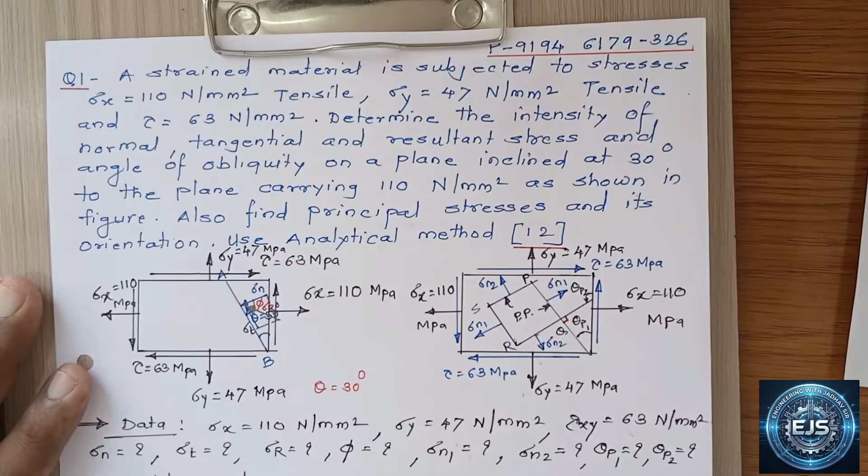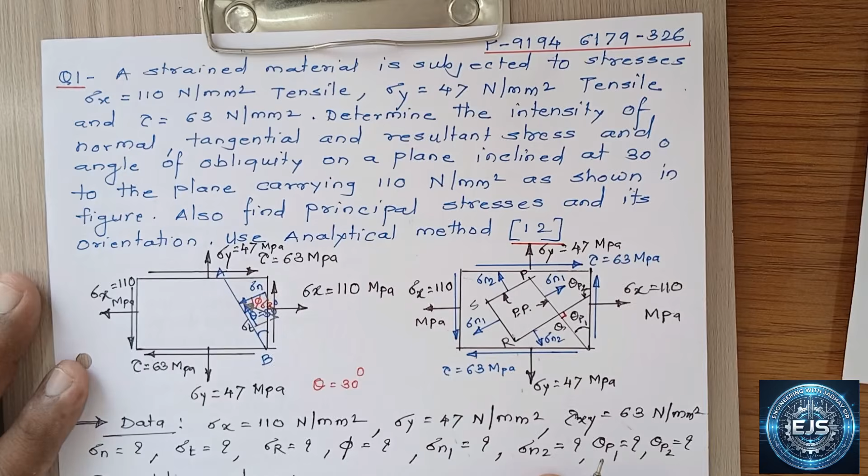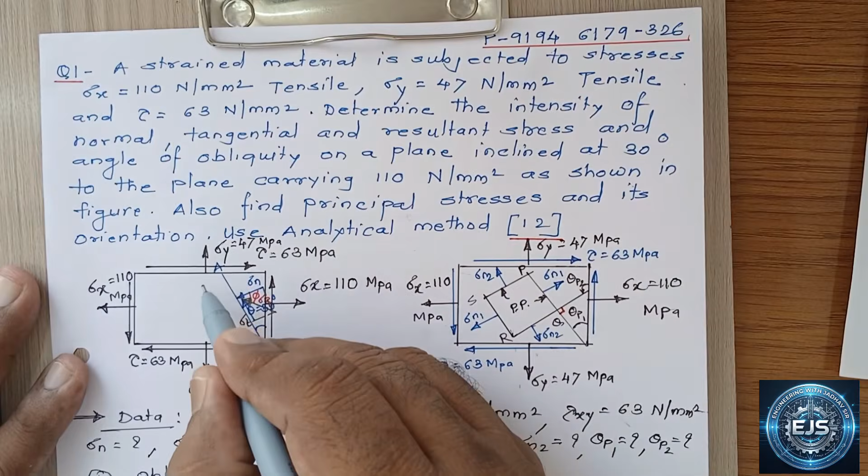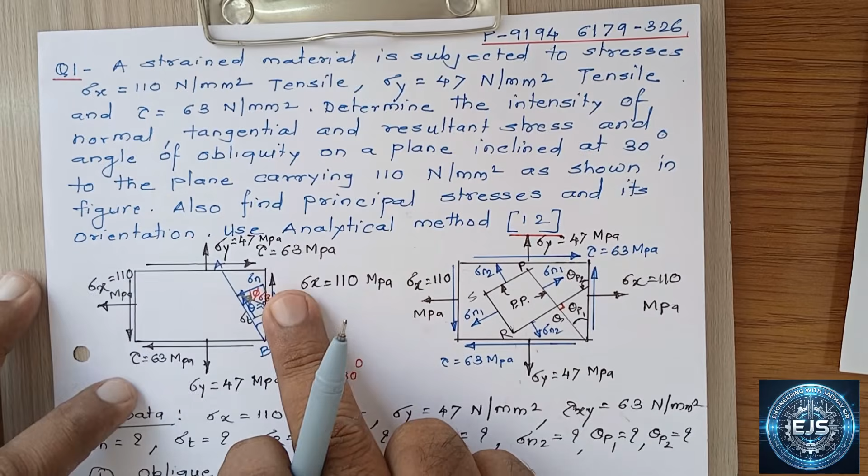Today we will discuss the first problem. A strained material is subjected to stresses: sigma x equal to 110 N/mm² tensile, sigma y equal to 47 N/mm² tensile, and shear stress 63 N/mm². So the component is subjected to biaxial stresses, sigma x equal to 110 megapascal and sigma y equal to 47 megapascal, both tensile in nature. There is also a torsional shear stress of magnitude 63 megapascal. On the horizontal plane the shear stress direction produces clockwise moment, and on the vertical plane the shear stress is of the same magnitude, 63 megapascal, but producing anti-clockwise moment.

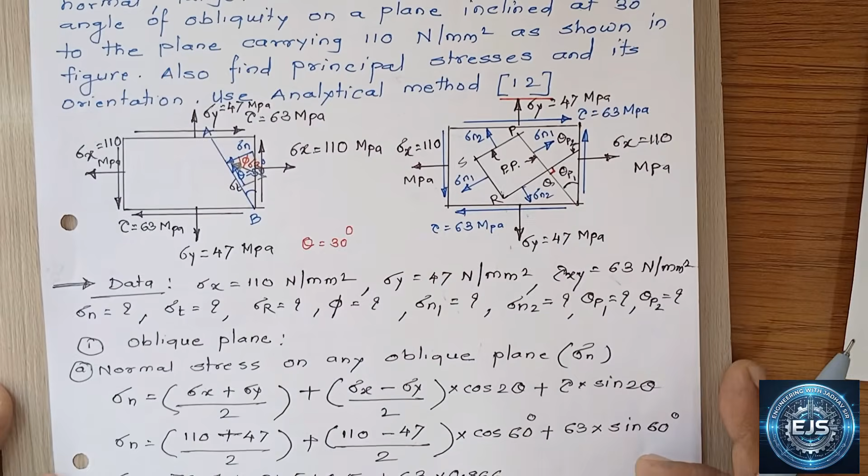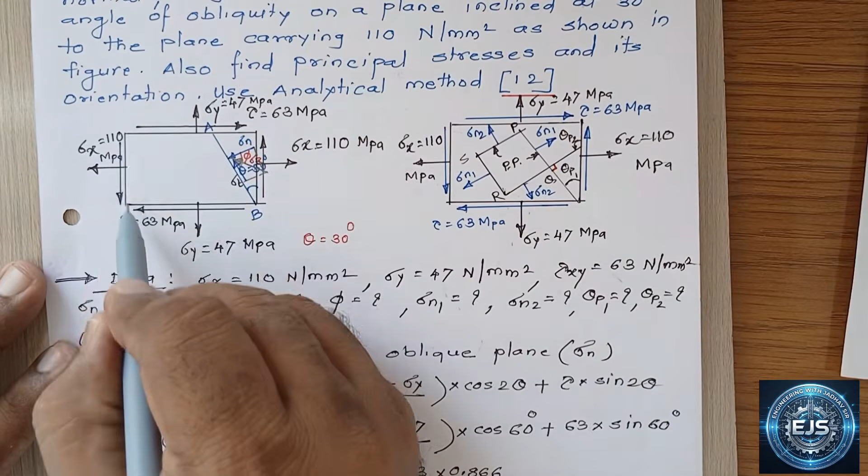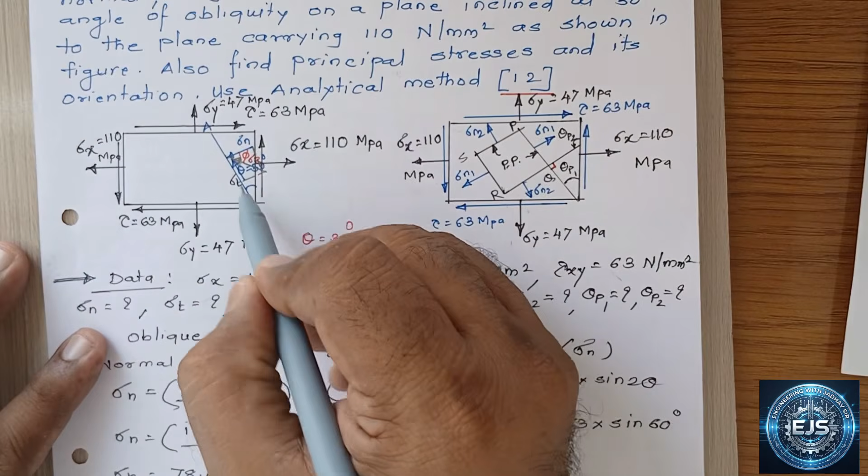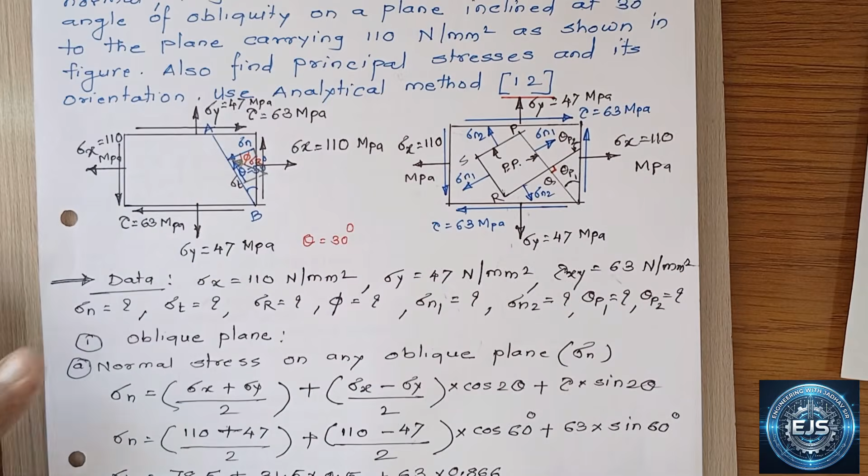This is a member subjected to tensile stresses sigma x equal to 110 megapascal, sigma y equal to 47 megapascal, both tensile, and shear stress tau. On the horizontal plane the shear stress produces clockwise moment, and on the vertical plane it produces anti-clockwise moment of the same magnitude, 63 megapascal. We consider the oblique plane AB, whose angle with the vertical plane is 30 degrees. On this plane, the normal stress, tangential stress, resultant stress, and angle phi need to be found in the first part. In the second part of the problem, the same member is subjected to biaxial stresses along with the shear stress tau.

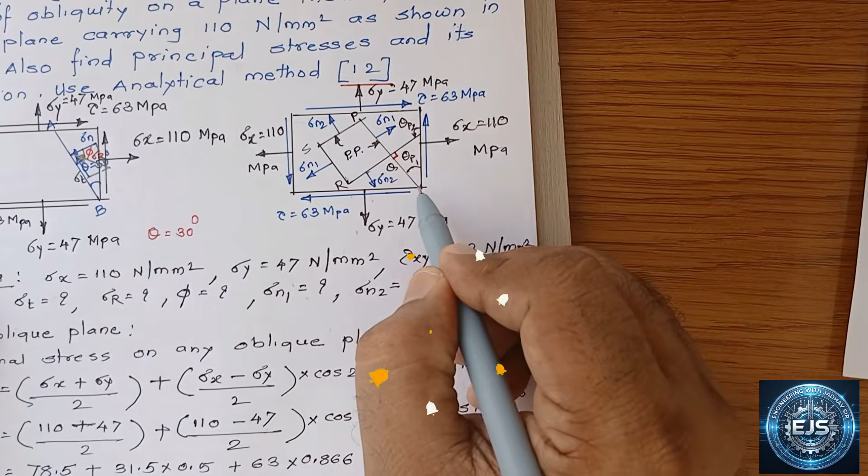Now in this case, theta p1 is the angle made by the major principal plane. In the diagram, PQ and RS are the major principal planes on which the major principal stress sigma n1 acts, and the angle of this plane with the vertical plane is theta p1. Theta p2 is the angle of the minor principal plane. We know the minor principal plane is perpendicular to the major principal plane. So theta p2 is the angle made by the minor principal plane, and here the minor principal planes are QR and PS.

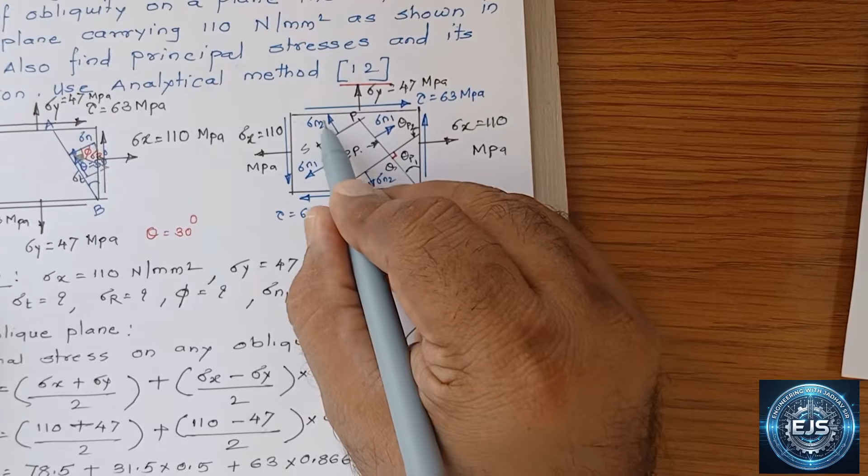So their angle is theta p2, and the normal stress sigma n2 is acting on the minor principal plane, and that sigma n2 is called as a minor principal stress.

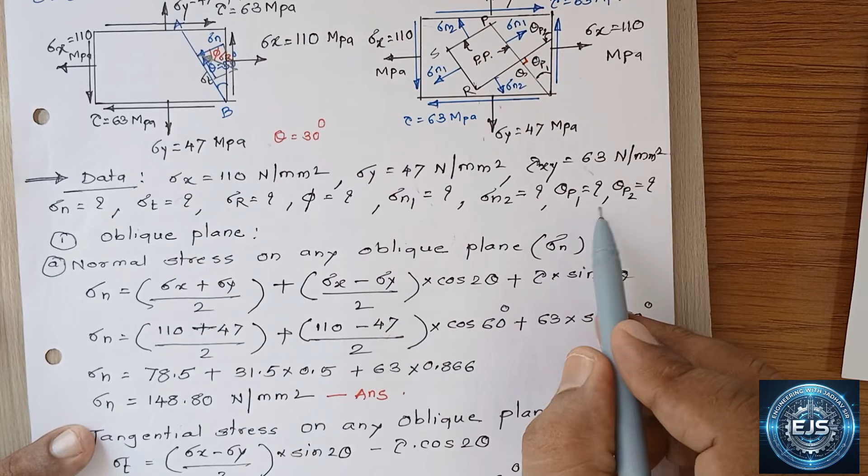So in the first part is concentrated on oblique, finding out the stresses on oblique plane which is inclined at 30 degree to the vertical plane.

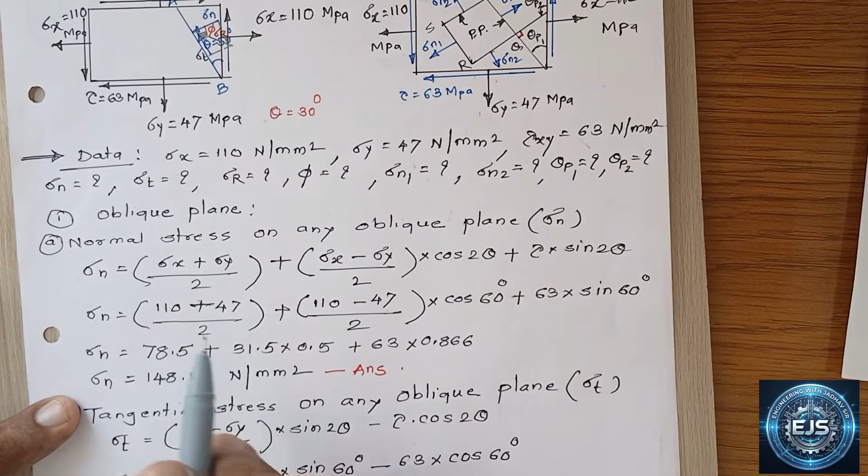और आज हम ऑब्लिक प्लेन पे स्ट्रेसेस कैलकुलेट करेंगे। नॉर्मल स्ट्रेस ऑन एनी ऑब्लिक प्लेन दैट इज सिग्मा एन, sigma n is equal to sigma x plus sigma y by 2 plus sigma x minus sigma y by 2 into cos of 2 theta plus tau sin 2 theta.

Sigma n is equal to sigma x is 110 plus sigma y is 47 divided by 2 plus sigma x is 110 minus 47 divided by 2 into cos of 2 into 30 is 60 degree. So cos of 60 degree plus tau is 63 multiplied by sine of 2 into 30 is sine of 60 degree. So from that we can calculate the normal stress.

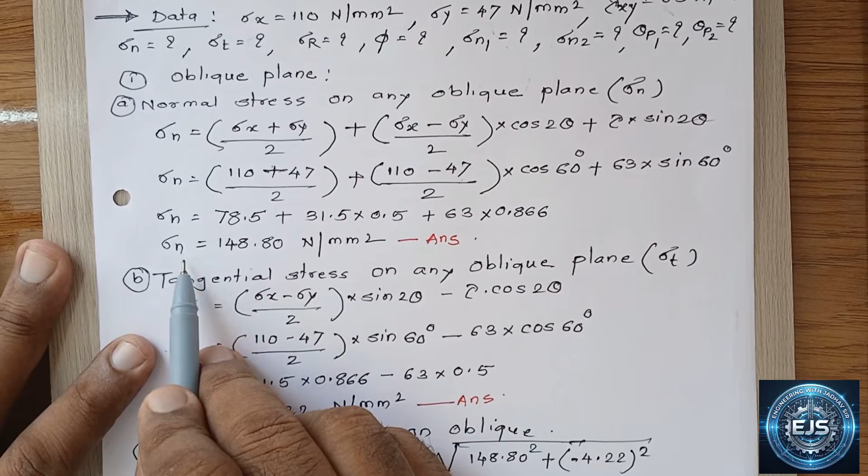Normal stress after calculation comes out sigma n is equal to 148.80 Newton per mm square. So this is our first answer for this problem by analytical method. Normal stress on oblique plane is 148.80 Newton per mm square.

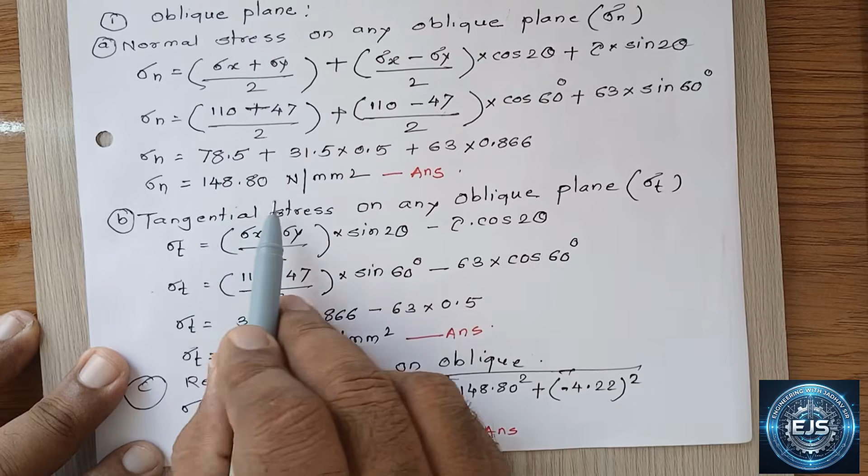Then second answer is tangential stress on this oblique plane. So sigma t is equal to sigma x minus sigma y by 2 into sine of 2 theta minus tau into cos of 2 theta. Putting the values, sigma t is equal to 110 minus 47 divided by 2 into sine of 60 degree minus 63 into cos of 60 degree.

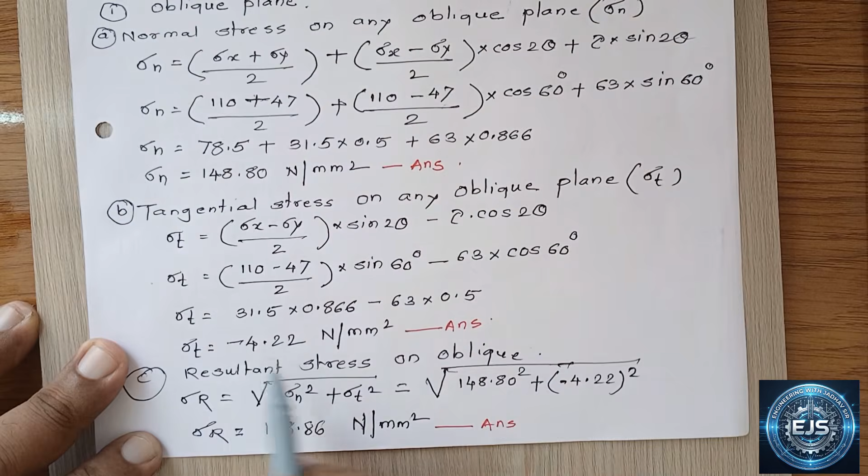तो सिग्मा टी हमारा आंसर आ रहा है -4.22 न्यूटन पर mm square. So tangential stress on this oblique plane, which is inclined at 30 degree with the vertical plane, is -4.22 Newton per mm square. So this is our second answer.

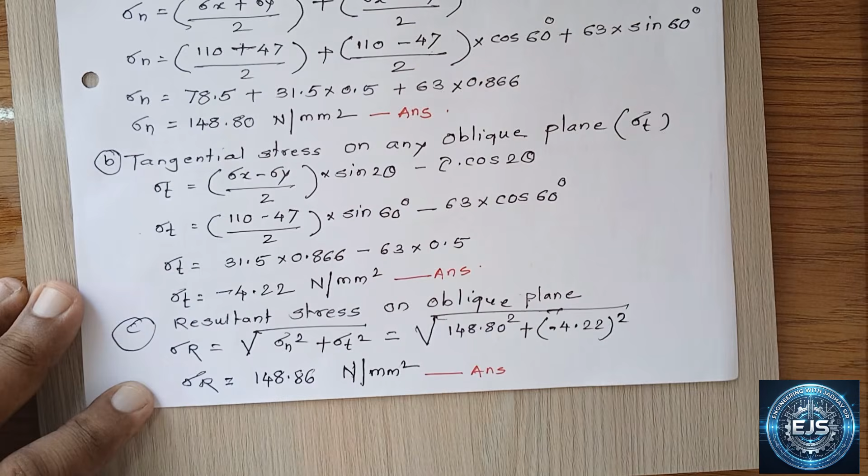From this normal stress and tangential stress, we have to find out the resultant stress on oblique plane. So resultant stress on oblique plane, sigma r is equal to root of sigma n square plus sigma t square.

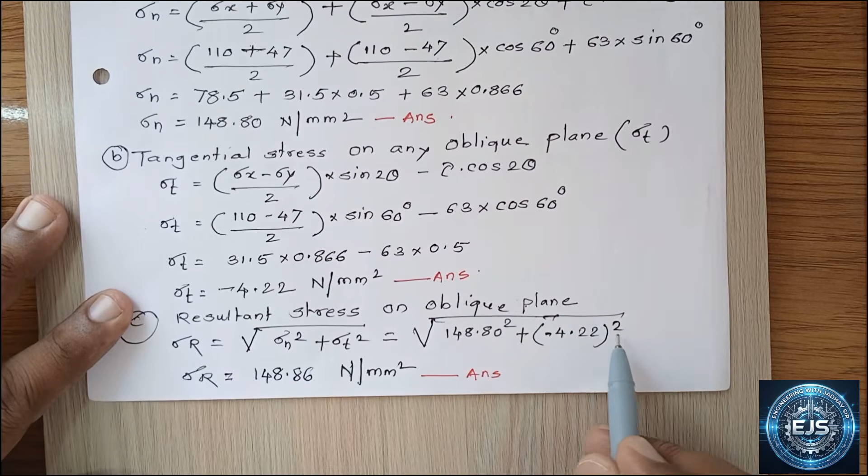So putting the values, sigma n is 148.80 square plus sigma t is minus 4.22 square. This is minus square, so this term will become plus. So sigma r is equal to 148.86 Newton per mm square. This is the resultant stress in this case.

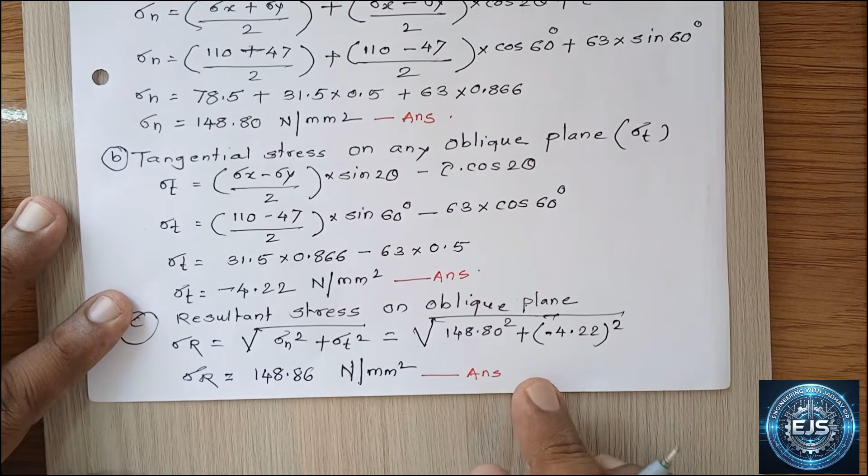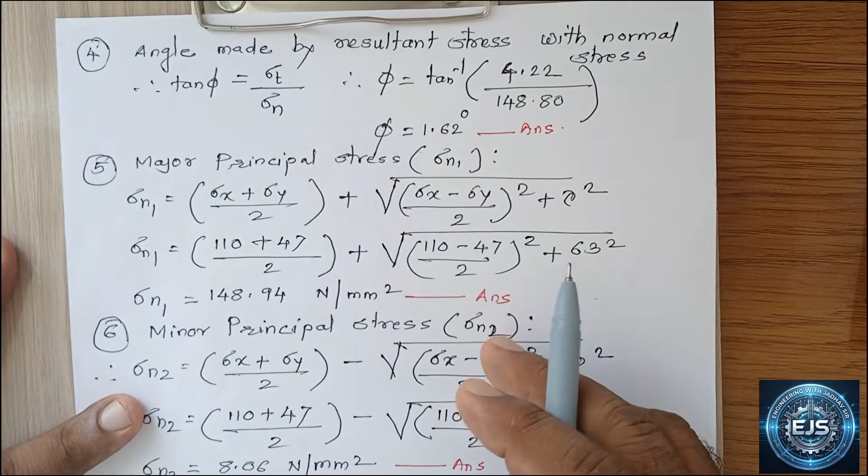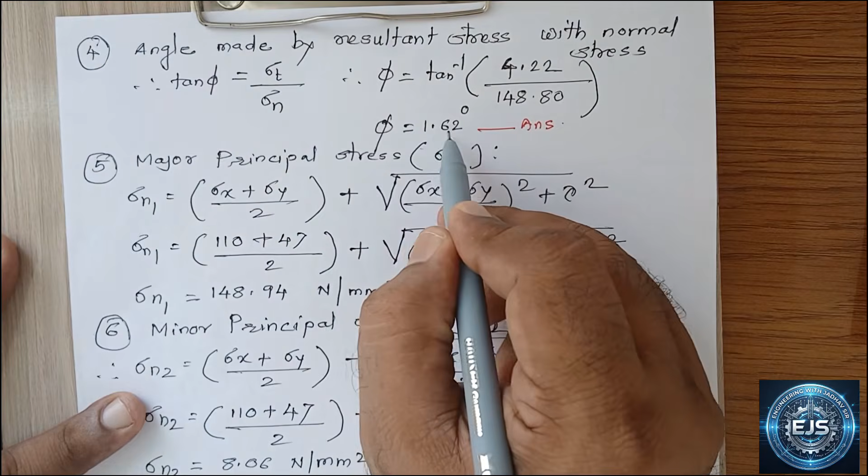So next step is to calculate the angle made by resultant stress with the normal stress direction. So tan of phi is equal to sigma t upon sigma n, where sigma t is the tangential stress and sigma n is the normal stress. So phi is equal to tan inverse of sigma t is 4.22 upon sigma n is 148.80. So phi angle we get 1.62 degree. So this is the angle made by the resultant stress with the normal stress direction for this problem.

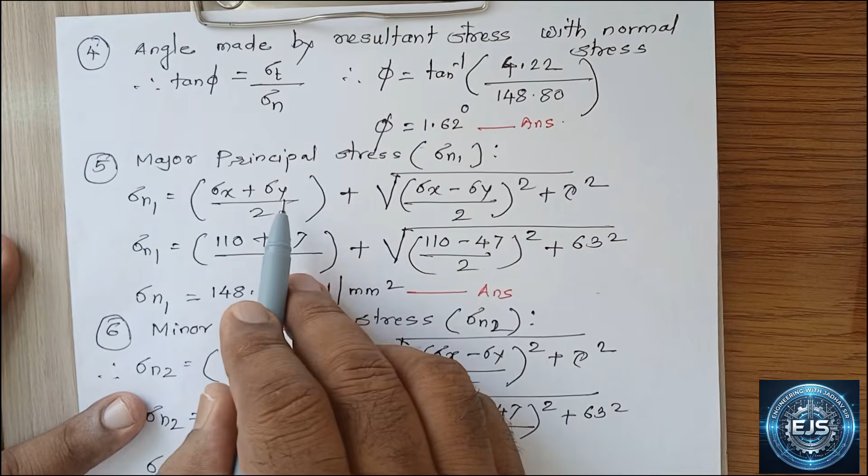Now the second part of the problem, that is fifth step, we can say, calculate the major principal stress, that is sigma n1.

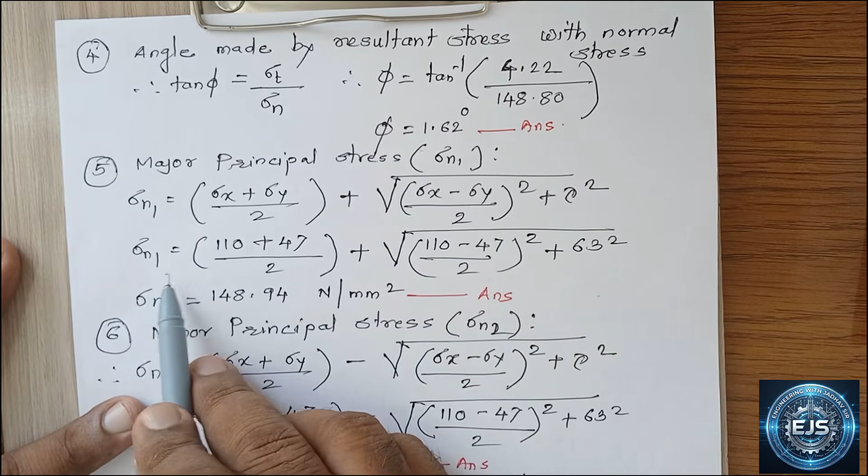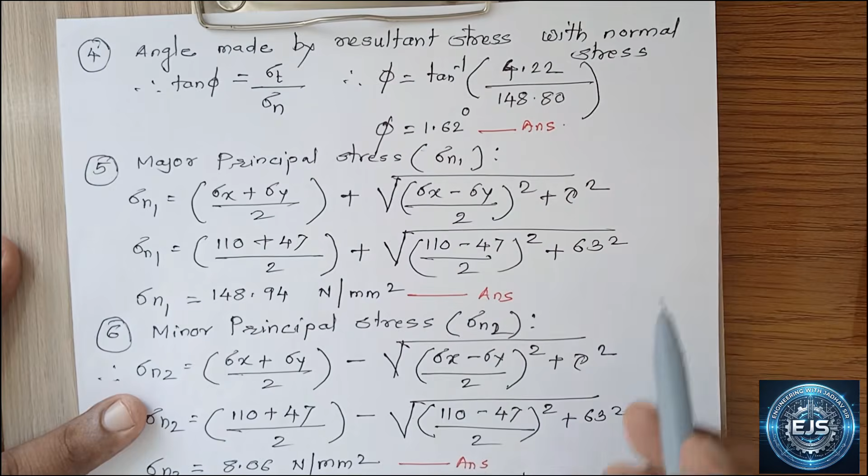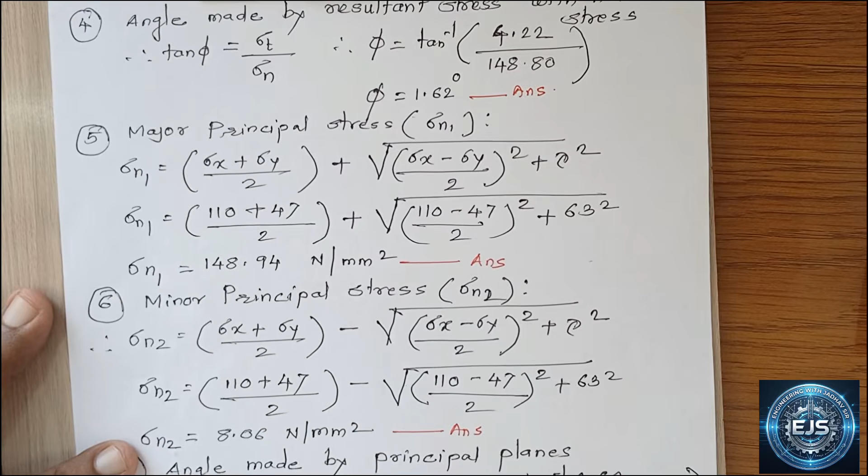Sigma n1 is equal to sigma x plus sigma y by 2 plus root of sigma x minus sigma y by 2 whole bracket square plus tau square. By putting the values, sigma x 110 plus sigma y 47 divided by 2 plus root of 110 minus 47 divided by 2 whole bracket square plus 63 square. So major principal stress sigma n1 comes out to be 148.94 Newton per mm square. This is our fifth answer for this problem. Major principal stress acting on this component is 148.94 Newton per mm square.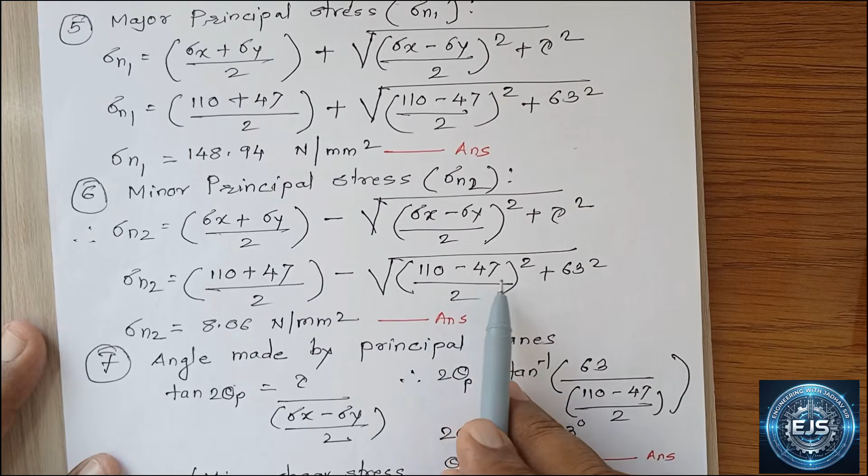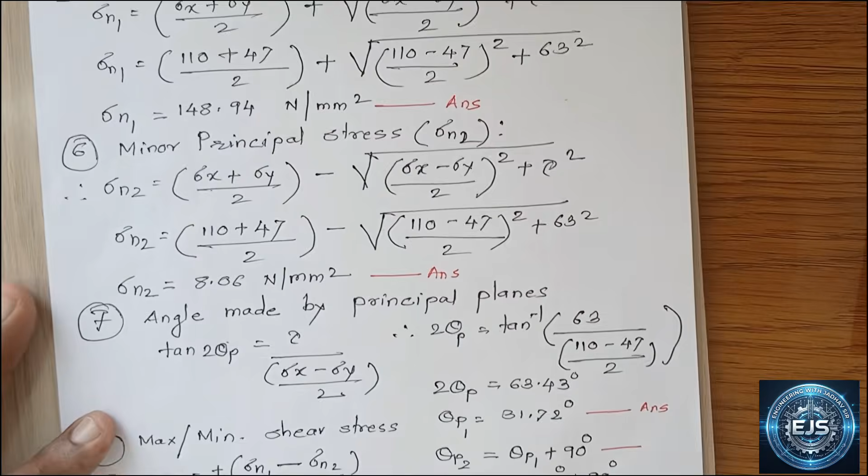Now sixth step is to calculate minor principal stress, that is sigma n2. Sigma n2 is equal to sigma x plus sigma y by 2 minus root of sigma x minus sigma y by 2 square plus tau square. Putting the values, sigma x equal to 110 plus sigma y 47, 110 plus 47 divided by 2 minus root of 110 minus 47 by 2 square plus 63 square. So sigma n2 value comes out to be 8.06 Newton per mm square. This is our sixth answer for this problem, sigma n2. So magnitude of major and minor principal stress we have calculated.

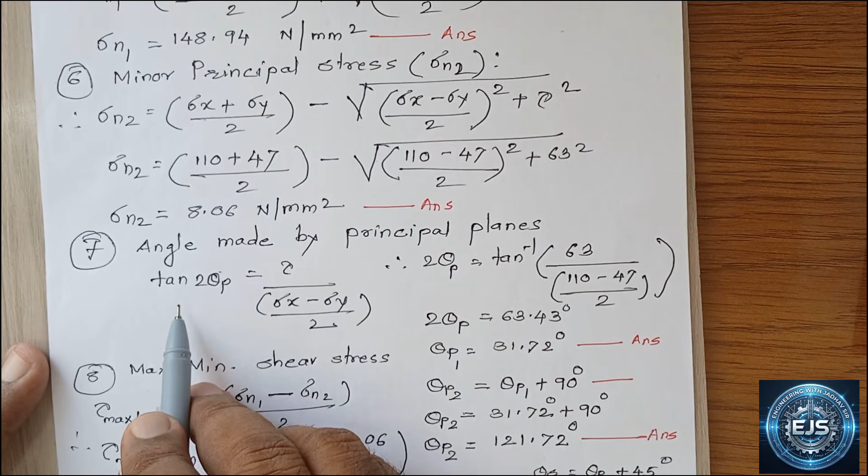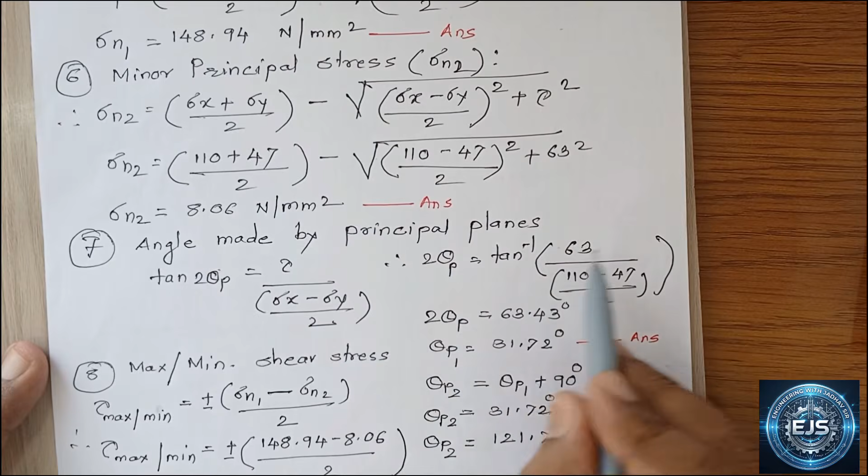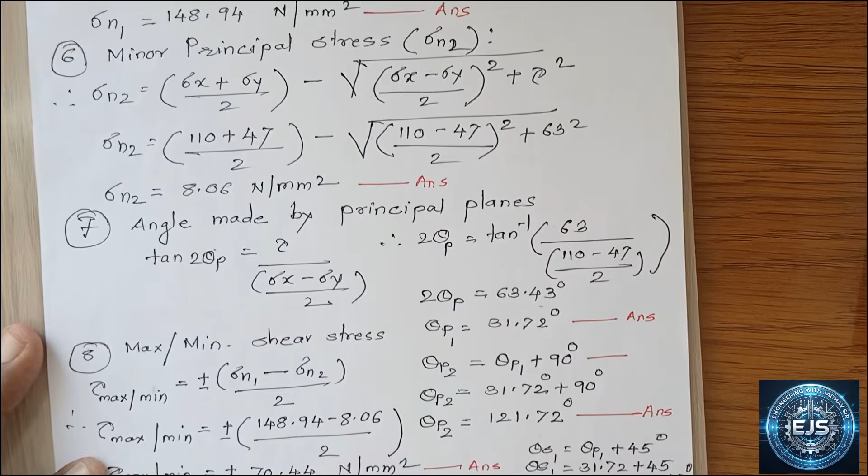Now seventh step is to calculate the orientation of this principal plane. Orientation means angles made by this principal plane with the vertical plane. The formula is tan of 2 theta p is equal to tau upon sigma x minus sigma y by 2. So from that, 2 theta p is equal to tan inverse of this value. Tau is 63 upon sigma x 110 minus 47 divided by 2. So 2 theta p is equal to tan inverse of this value, that is 63.43. Therefore theta p, that is theta p1 angle, we get first. Theta p1 is half of 63.43, that is 31.72 degree. So this is theta p1. Theta p1 is nothing but angle made by the major principal plane with the vertical plane.

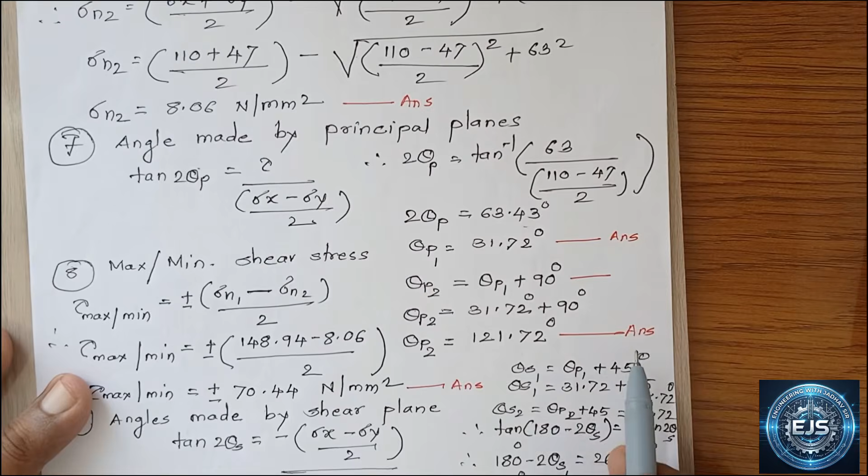Now for minor principal plane, theta p2 is equal to theta p1 plus 90 degree, because we know major and minor principal planes are always at 90 degree to each other. So theta p2 is equal to theta p1, that is 31.72 plus 90 degree, so this angle comes to 121.72 degree. So angle made by the minor principal plane with respect to vertical plane is 121.72 degree. This is the seventh answer for this problem.

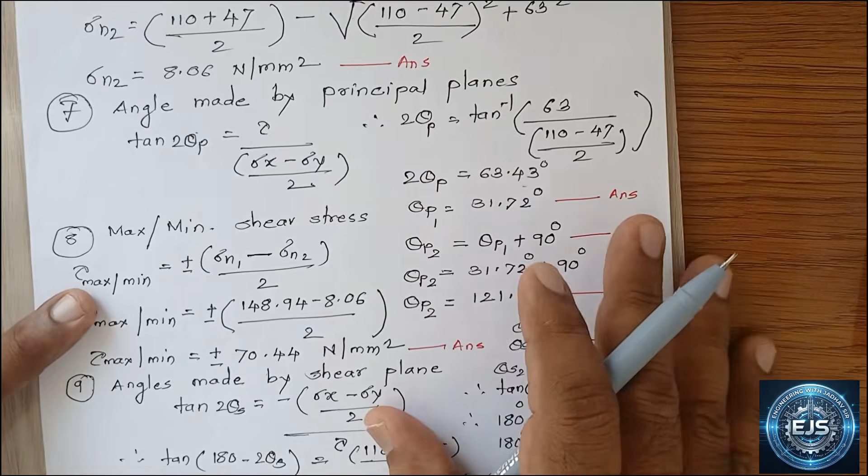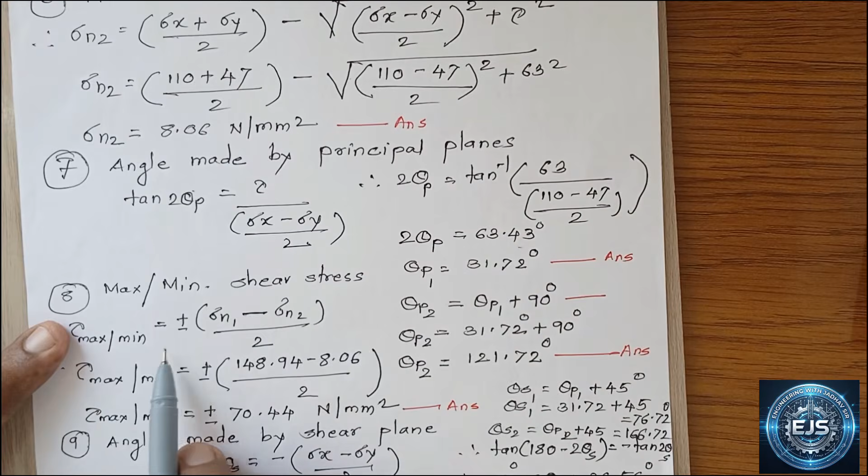Tau max or tau minimum is equal to plus or minus sigma n1 minus sigma n2 by 2, where sigma n1 is the major principal stress which we calculated, 148.94, and sigma n2 is 8.06. So maximum or minimum shear stress is calculated by plus or minus, sigma n1 minus sigma n2 divided by 2. Putting the value of major and minor principal stress, tau max or tau minimum is equal to plus or minus 148.94 minus 8.06 divided by 2. So maximum shear stress is plus and minimum tau minimum is minus, and it is 70.44 Newton per mm square. This is the answer for maximum and minimum shear stress developed in a component when it is subjected to combined stresses, that is sigma x, sigma y and tau.

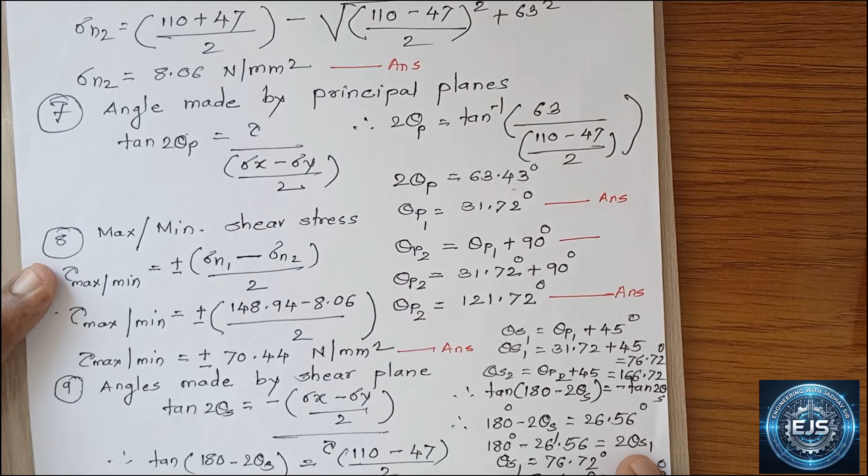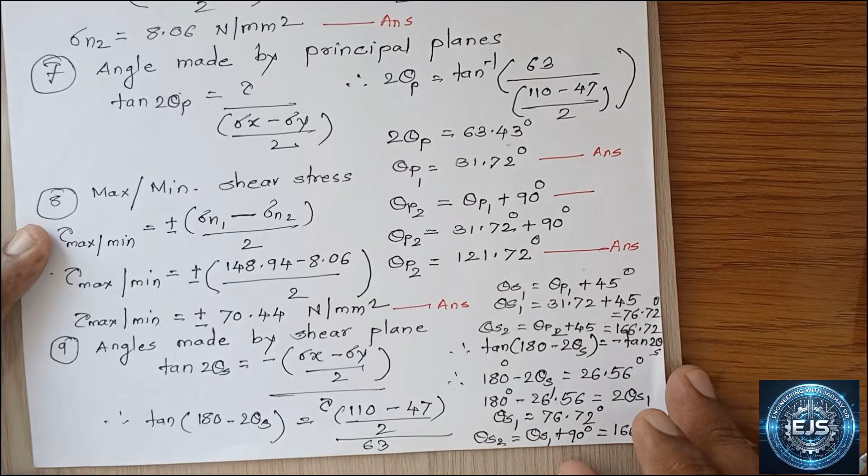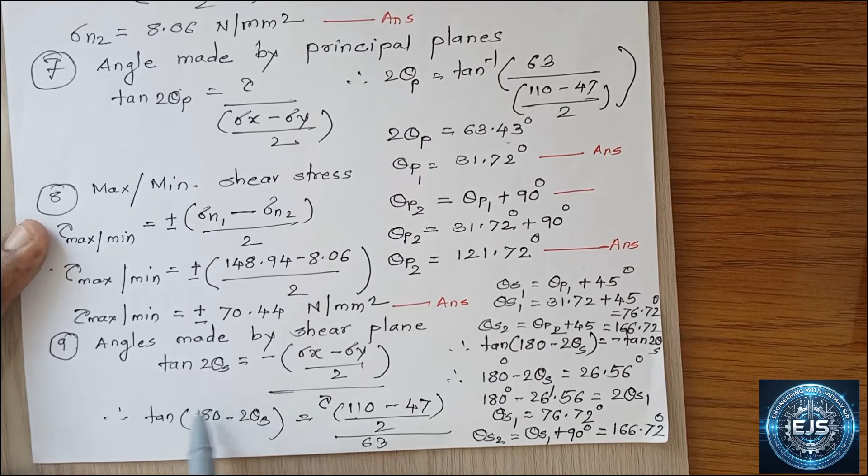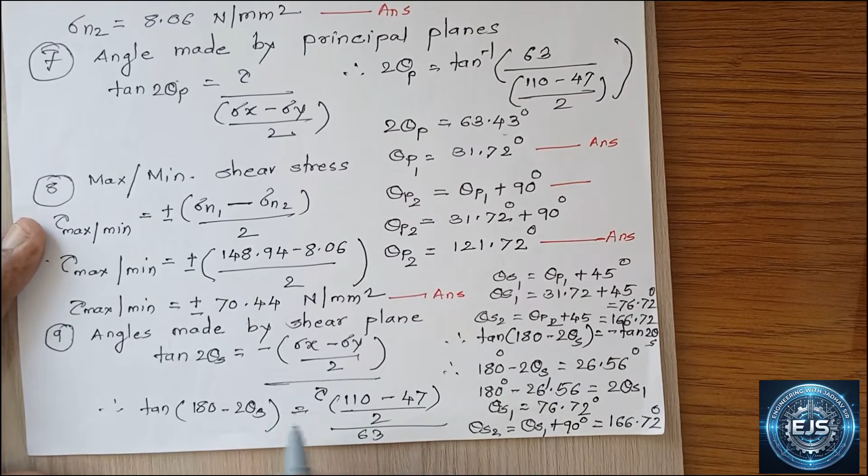Now ninth step is angles made by the shearing plane. There are two shearing planes which are perpendicular to each other. One shearing plane carries maximum shear stress and another shearing plane carries minimum shear stress. To calculate the angles made by these shearing planes with respect to the vertical plane, we have to use this formula: tan of 2 theta s is equal to minus of sigma x minus sigma y by 2 upon tau. Here since this angle is negative, we have to use the formula tan of 180 minus 2 theta s is equal to minus tan 2 theta s.

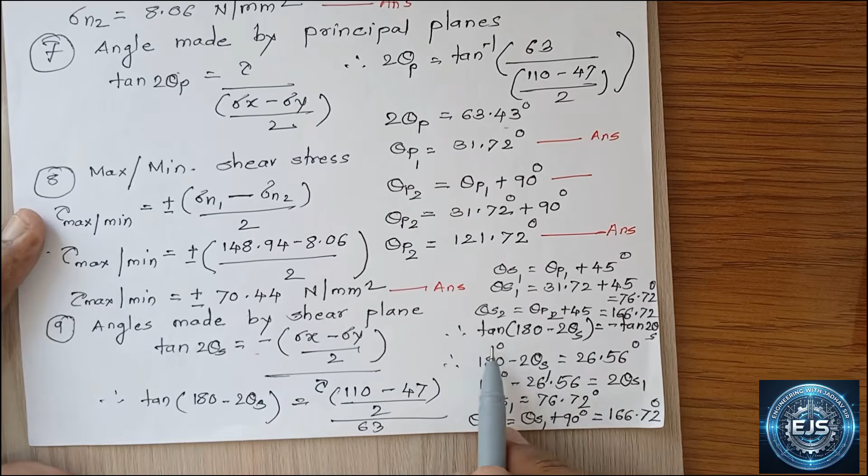So we have to use this formula, tan of 180 minus 2 theta is equal to minus tan 2 theta, because this angle is minus. So in order to remove this sign, we have to take this formula into consideration. Tan of 180 minus 2 theta is equal to minus into minus, which will become plus.

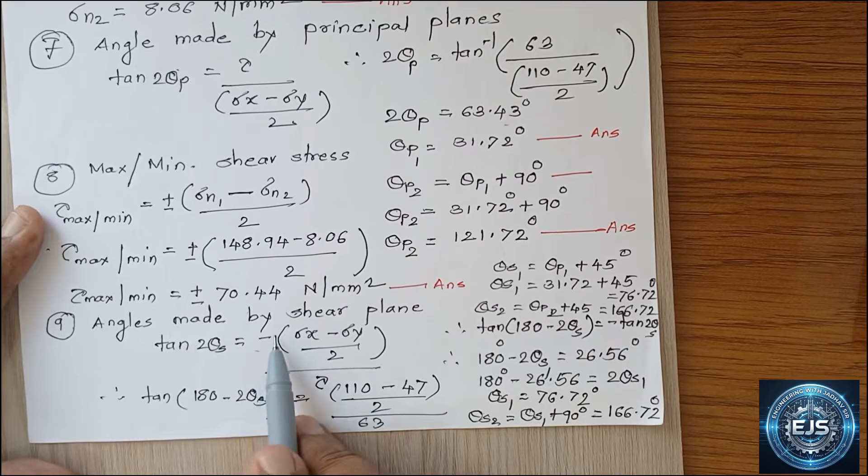Sigma x is 110, minus sigma y is 47, divided by 2, divided by tau is 63. So 180 minus 2 theta s is equal to tan inverse of this value, and tan inverse of this value is 26.56. So rearranging the terms, 180 degree minus 26.56 is equal to 2 theta s1. Therefore, we can calculate theta s1, half of this, and theta s1 after calculation is 76.72 degree.

What is theta s1? Angle made by maximum shear plane with the vertical plane. And the second angle is theta s2, angle made by the minimum shearing plane, equal to theta s1 plus 90 degree. So 76.72 plus 90 is 166.72 degree. In this way we have calculated the angles made by the shearing plane with respect to the vertical plane.

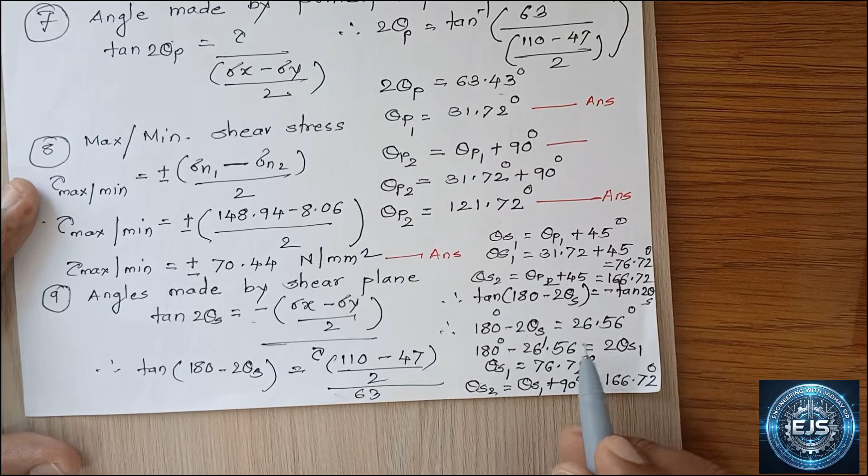So theta s1 and theta s2 are the angles made by maximum and minimum shearing plane with the vertical planes respectively.

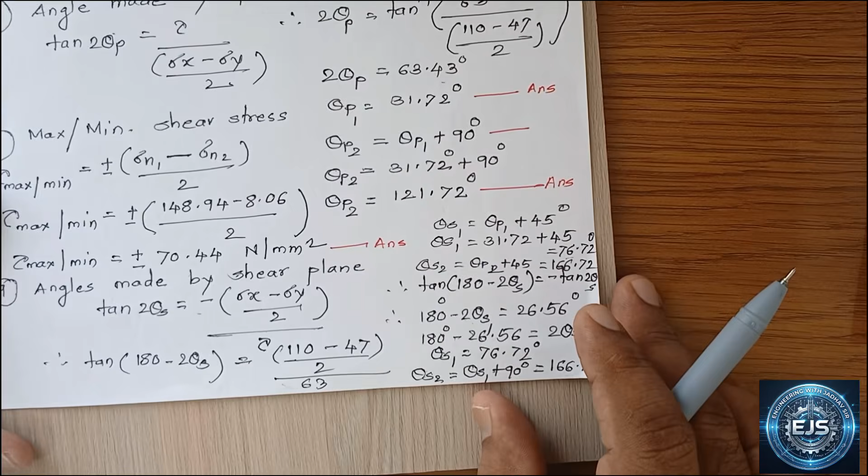Same problem we will solve by graphical method, that is Mohr circle method, and we'll compare the answer by analytical and graphical method. So you can solve this same problem by analytical method and graphical method.